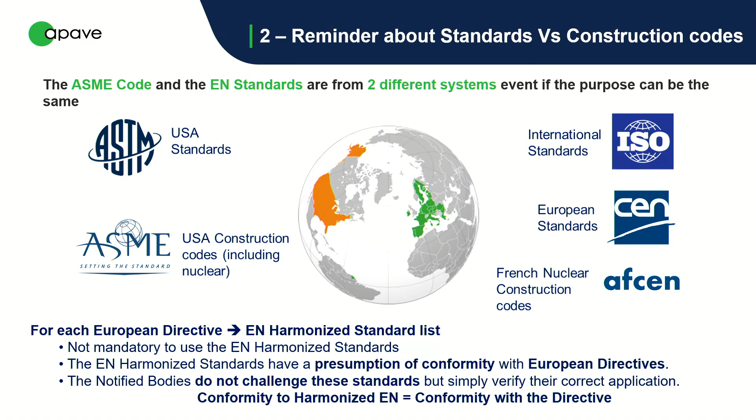So these two codes represent maybe 99% of the code used in nuclear in the world. So you need to choose your code, American style or French style, European style. So very quickly, this is just the content of RCC-M.

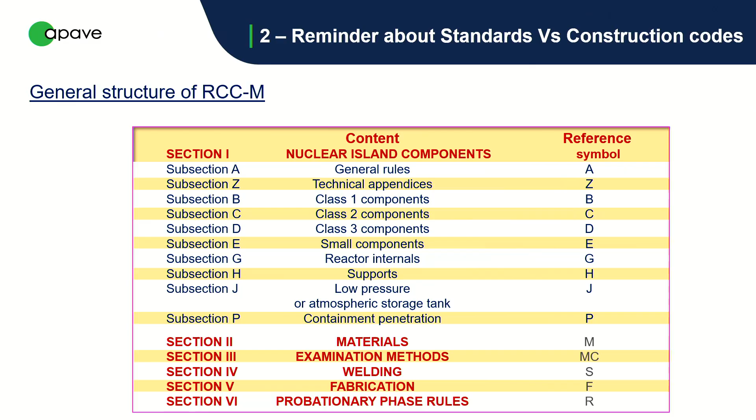As you can see, there are three classifications. Class 1 is top level, so the reactor core, the first primary loop, and class 2, 3, etc. Of course, we are talking about material, we are talking about examination method, welding, fabrication, and other innovation in section 6. As you can see, and it will be explained by my colleagues about ASME code.

Yes, so this is the way ASME codes are organized. ASME boiler and pressure vessel code, it's got total 13 sections, out of which 2 are dedicated to nuclear. Section 3 is for new construction of code items, and section 11 is for in-service inspection. So section 3 is further subdivided into different divisions.

Subsection NCA covers general requirements, mainly for Division 1 and Division 2. Of course, there are some references of NCA you will find in Division 4 and Division 5 as well. But then we have appendices which give some supplementary technical information like forms to be used for certifying a code item and other things like that.

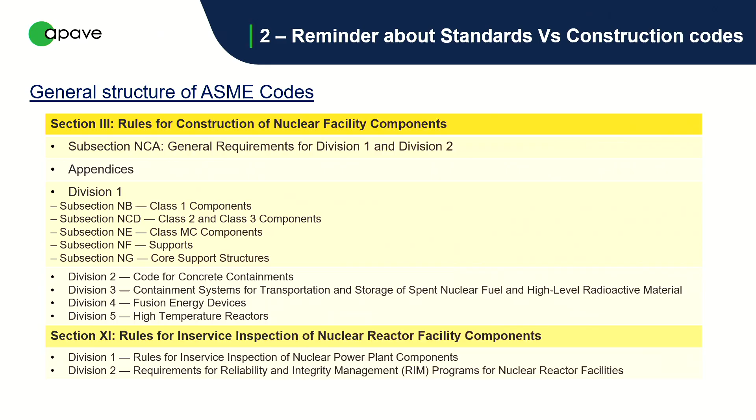Division 1 is again subdivided into 5 subsections. Subsection NB is for class 1 components. Then you have subsection NCD. Earlier it used to be 2 different subsections, NC and ND. They have combined it to cover class 2 and class 3 components. It's called subsection NCD. Then NE covers your class MC components, metallic containment components, NF for supports, and NG for core support. Division 2 is dedicated for concrete containments.

Division 3 is for containment systems, basically for transportation of spent fuel and other stuff covering that. Division 4 is for fusion devices, which is a relatively new code. Division 5 is high temperature reactors. It covers SMRs as well.

Then section 11 is divided into two, again, divisions, division 1 and division 2. Division 1 specifies rules for inspection during in-service. And division 2 is dedicated for basically risk mechanism, identifying the risks and mitigation strategies, reliability and integrity management and stuff like that. Thank you.

So now if we put the two organizations, the RCC-M one and the ASME code one, we can see that it is almost the same. Almost the same for two main reasons. One is because we are talking about mechanical equipment, so pressure equipment. So of course we need material, we need examination method, we need classification of different equipment, etc., and support, everything we need to create from design to the end of manufacturing, everything related to a pressure equipment.

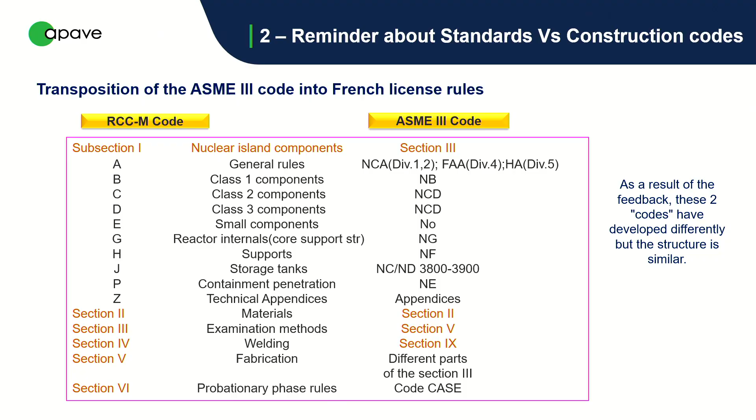Because mainly the reactors developed in the world are pressurized water reactors. So of course we are always managing pressure. So the first reason is because we are talking about the same equipment. And the second reason is that initially in France, the first reactors created in France for commercial purpose were the 900 megawatt reactors, and they were made under license of Westinghouse. So initially they were made according to ASME.

In 1980, in France, we created AFCEN, the French Association for Nuclear Construction Code, and we did not copy-paste, but we were a lot inspired from ASME code. Okay? So, of course, we have almost the same structure for these two main reasons. Okay?

So, warning, ASME is from United States, RCC-M from France and mainly Europe. So, of course, we are close to regulation. ASME code is very close to the American regulation. And of course, RCC-M is very close to the French and European regulation. Easier to use a French code in France than a French code in United States because there is no link with the local regulation.

Nevertheless, a construction code is made to manage the regulation and to manage the contractual relation between the different actors. And in general, you apply a construction code if you want or another one, and you need to demonstrate the compliance with the regulation.

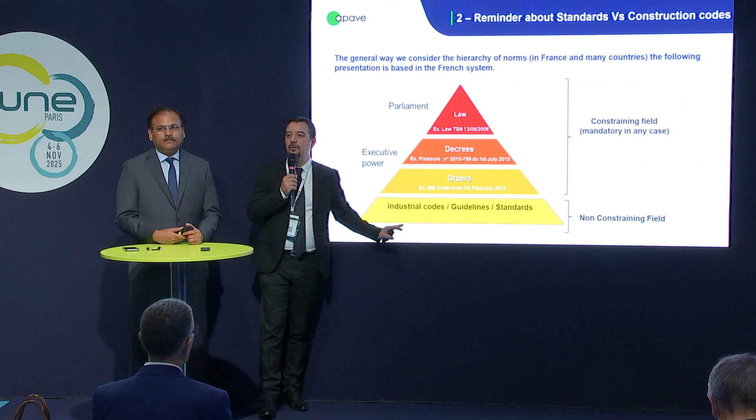We call that right. And then the non-constraining field is the construction code, standard, etc. So in fact, we can call the non-constraining field the contractual field. This is mandatory, this is not mandatory.

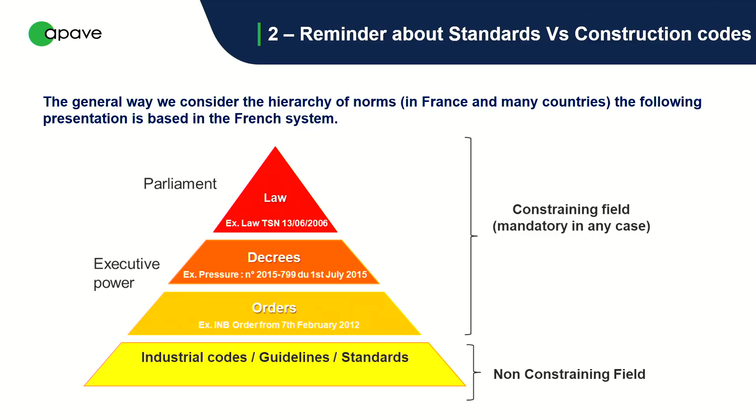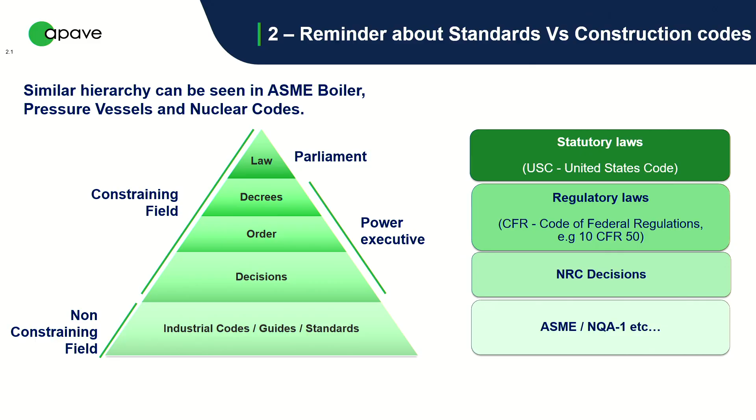Then come your regulatory laws, which are basically enforced by the regulators. These basically specify detailed requirements for complying with a law. An example is the Code of Federal Regulations, 10 CFR 50. Then come NRC decisions. NRC is the regulatory authority in the US. They publish a lot of material giving you the rules and regulations and the requirements for particular aspects of the constructions. They are followed by ASME code and requirements such as NQA. ASME codes have been accepted as one of the means of fulfilling the regulations.

It's yours also. Yes.

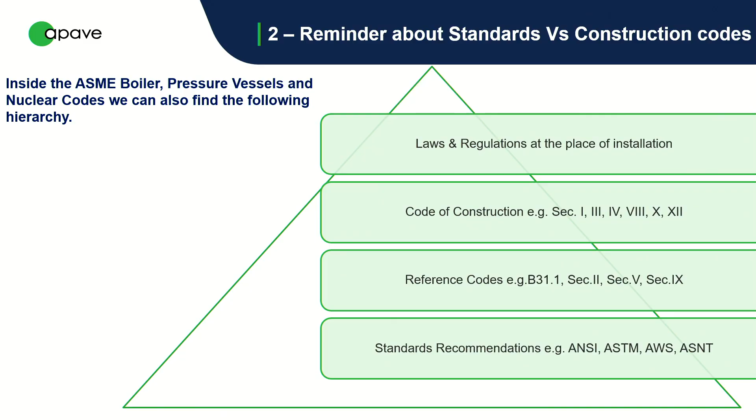These construction codes give reference to other codes or other subsections for particular aspects. For example, Section V is referred to for NDT, Section IX is referred to for welding. But there could be some requirements which are conflicting with this code. In that case, the code of construction always takes precedence. And the last is the reference standards, which are basically dimensional standards like B16.5, B16.9 or B16.11. These are the standards which are referenced within the construction code or sometimes the reference code. So they take the last precedence.

Yeah. So next slide. We'll try to accelerate a little bit because time is running. Yeah. For you. Yes.

So the role of the AIA basically goes beyond code compliance. Of course, the primary duty of an AIA, Authorized Inspection Agency, is to make sure that the requirements of the construction code are fulfilled and the item fulfills all the requirements so that it can be stamped with a particular code stamp. We are referring to it as an N stamp as an example. To be technically correct, nowadays ASME has revised their terminology. It is called the ASME certification mark with N designator. But popularly it is called the N stamp.

So the role of the AI is not only to make sure that the product complies with the regulation, but the involvement starts much before you even start the fabrication. The AIA helps you in developing the quality system, laying out the foundation for all the code constructions, writing down the procedures and work instructions to ensure that the item produced using those procedures will meet all the applicable requirements of the code. So normally, the AI is involved before the start of fabrication, during the fabrication, and at the final stage of completion, witnessing the final testing.

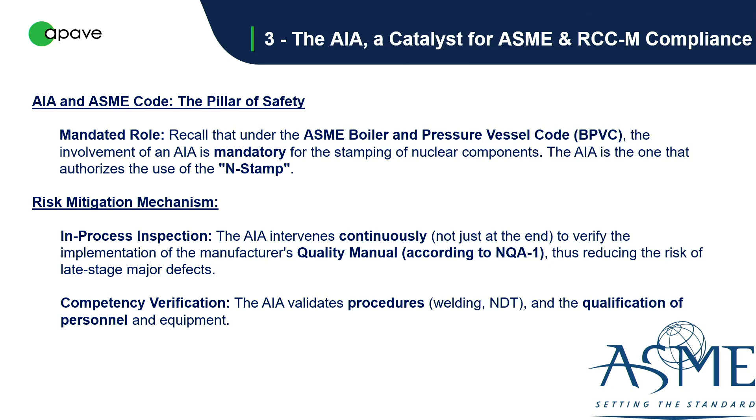Regarding the French vision, it's a little bit different. In fact, we are more focused on independence regarding the activity we have. In the French RCC-M code, and of course in the French regulation, the AIA doesn't exist. We are an independent third party. We can call it an agreed notified body, organisme habilité in French, or what you want. There is no stamp in RCC-M, so it's a little bit different from the ASME code, where we normally ask for a stamp. So no stamp is requested. In fact, the project risk mitigation is made by an independent body where we verify the compliance between the construction code and what is done in real life, and whether the requirements from the regulation are applied.

Try to accelerate a little bit.

Something very important to keep in mind: ASME in the United States is related to regulatory requirements. In fact, if you look at 10 CFR 50, you need to apply a quality system compliant with NQA-1, and applying ASME is quite good. Of course, if you apply NQA-1, you have an N stamp in order to design and manufacture nuclear pressure equipment.

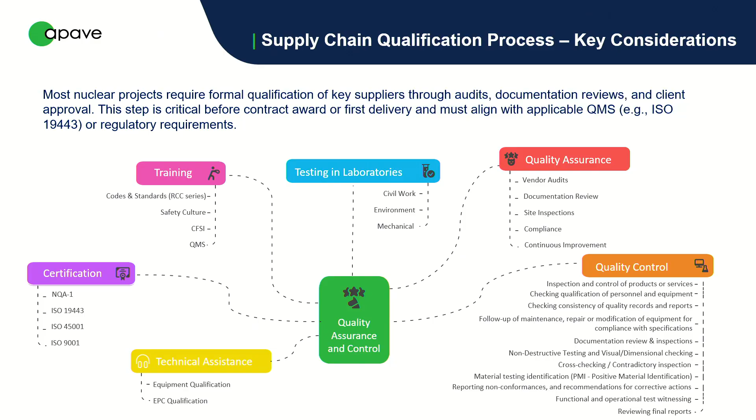Of course, QA/QC covers testing, quality control, quality assurance, and quality management systems. I'll accelerate a little bit. Very quickly, in QA you see the activities Apave can provide: independent third-party inspection, regulatory inspection, technical assistance, but also quality assurance activities. We also provide quality control activities. And of course, this has an impact on strategy and risk mitigation. And I'll let Manish continue.

Yes. As we mentioned before, the role of the AIA is more than just product inspection. It starts right from inception to completion. The AIA helps you make sure you meet the requirements of applicable regulations and helps you identify problems at early stages, before they become catastrophic or even before they occur. To do this, the AIA's involvement goes from defining the quality system to ensuring the work procedures are correct and performing physical and final inspection of the products. Thank you.